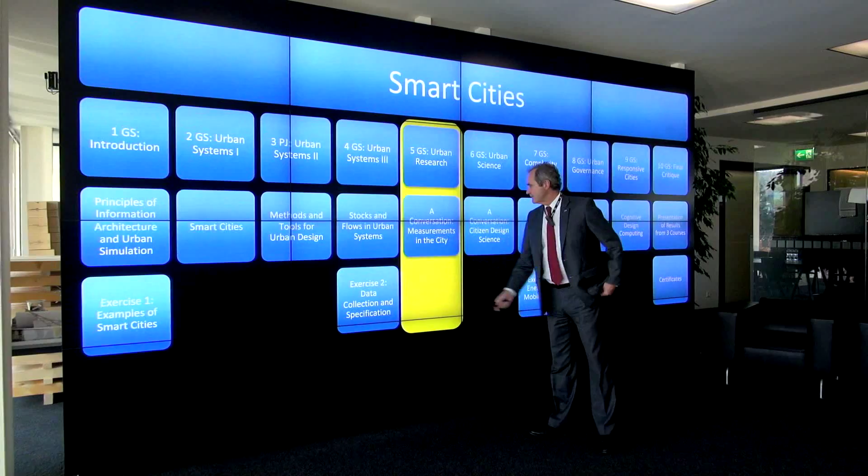We are here now on our fifth lecture. It's a conversation on measurements in the city. And this is, of course, in context with the next lecture, which will be on urban science. So urban research and urban science are closely related.

The story so far: last time, two weeks ago, we had this big topic of stocks and flows, and why they are important. From this rock falling down, you could visually see how a stock, a mountain stock, is turning into a flow. So this is just one link. But we could see that stocks and flows are fundamental concepts for understanding the working of a city and also of a smart city.

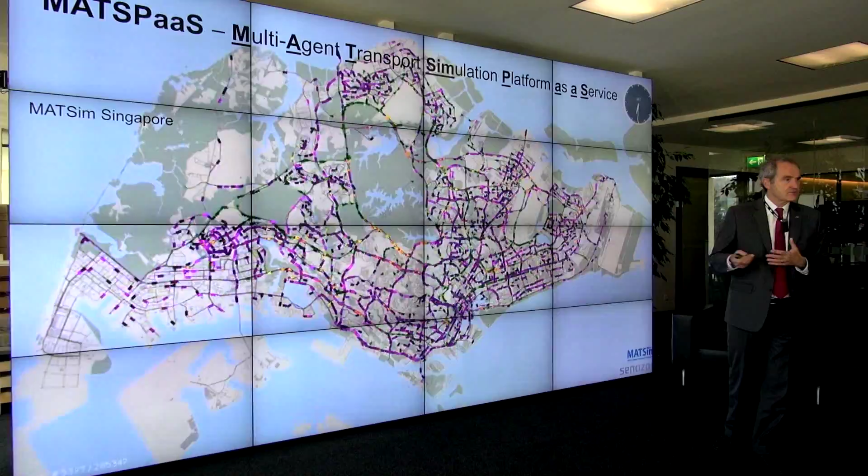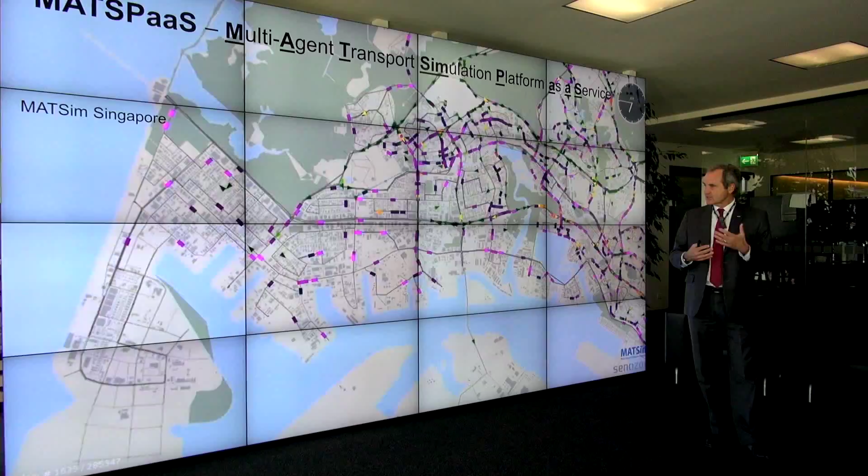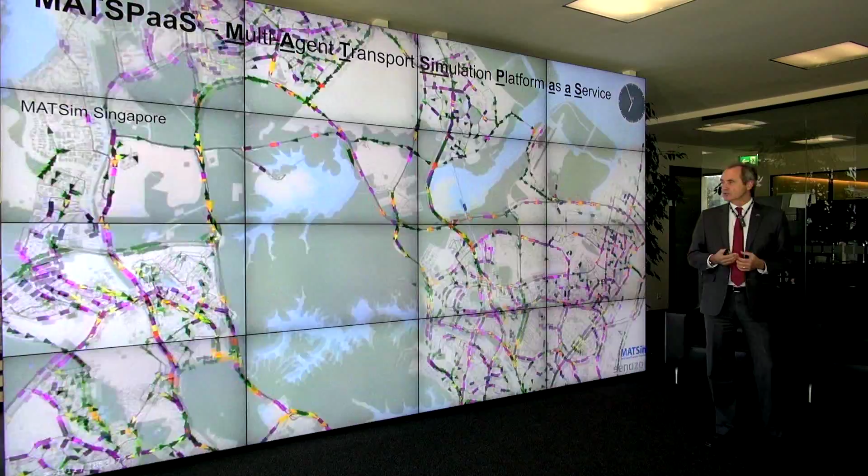If you remember this image here, this obviously is a result of urban research. That is the traffic simulation. And if you remember what simulation is, simulation needs an underlying model. It needs to have connections between the parts of the model, and then you can project something into the future that you want to have as close as possible to the real thing. In this case, the real thing would be the movement of cars and other vehicles in a city. So this is the result of urban research.

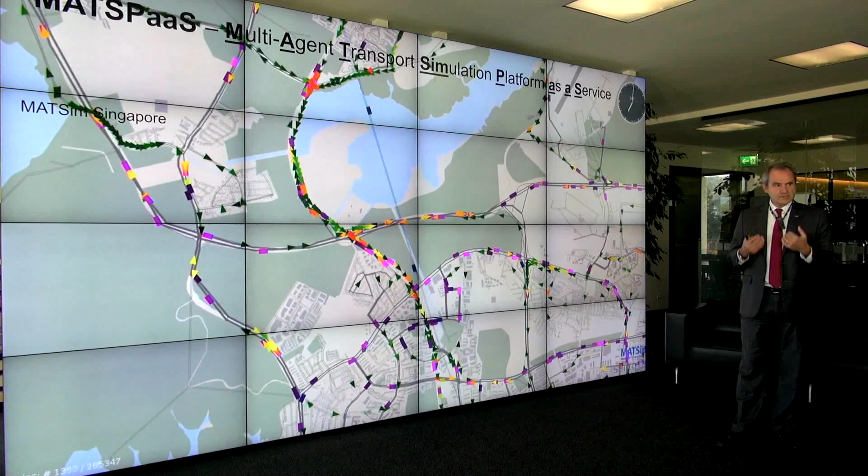But today we want to go a bit deeper and look at how we actually do that. And for that, we have to try to understand cities. The understanding of cities is a big topic that will probably never end, but I want to give you one route of understanding cities that is quite known to maybe some of you, but it's at an early stage of urban research.

We had a person, a mathematician actually, whose name was Christopher Alexander. Does anyone of you know Christopher Alexander? Ever heard of him? Yes? What did you hear of him so far? The Notes on the Synthesis of Form. The Notes on the Synthesis of Form, exactly.

And he also wrote A Pattern Language. And he also wrote another one which is quite famous, another book in the 60s, in the mid-60s already. That's called A City is Not a Tree. And The City is Not a Tree, this is an excerpt from this book.

And I think it's quite helpful to understand how different people view cities and try to understand cities. So he writes: 'The tree of my title is not a green tree with leaves. It is the name of an abstract structure. I shall contrast it with another, more complex abstract structure called a semi-lattice. In order to relate these abstract structures to the nature of the city, I must first make a simple distinction.'

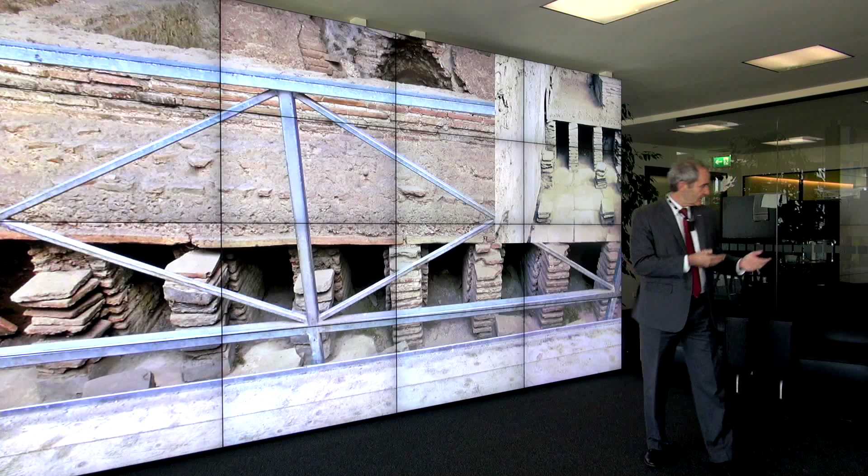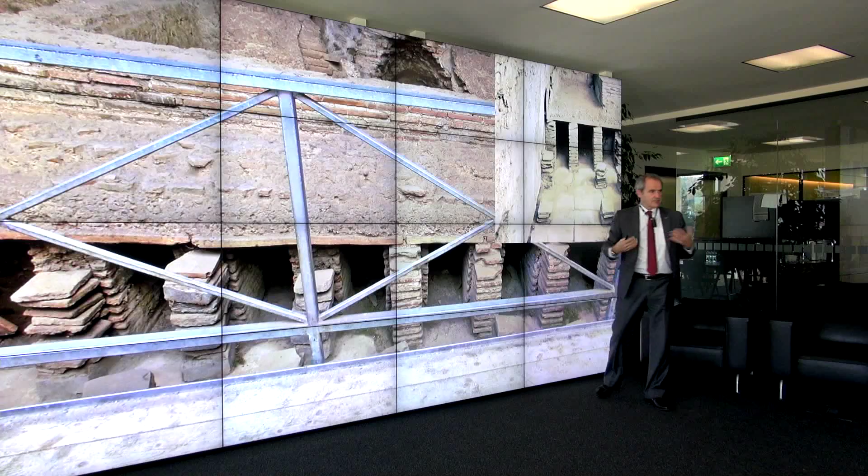So how could it happen that they didn't check it? What happened? They didn't have a model of what this meant. Although after the first rumblings of the mountain, their water supply, which was also sophisticated, coming in leaden pipes almost 2,000 years ago, stopped running. And they didn't have a model, they didn't know what to do, they didn't do the measuring. They did some visual checking, because they saw the mountain erupt. But even after they were covered with ashes after the first evening, they didn't take the right decision.

They didn't understand it. They didn't take this warning sign. They didn't take action. They just remained there. They waited. They thought it's over, like a thunderstorm.

And then, of course, what happened? The next day, the whole plume collapsed, and then you had this terrible hot air and hot ashes and hot lava coming down and wiping out everything and everybody. So the point is this: in a smart system of a city, it is very important to have all these things working. Today, hopefully, that would never happen again, because in many places in the world where volcanoes are active, all these chains of actions have to be taken, and mostly are taken.

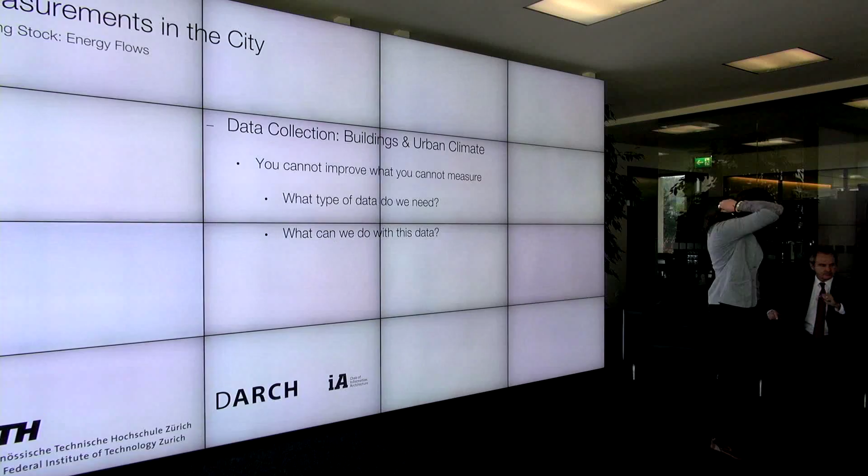And I'll also take this.

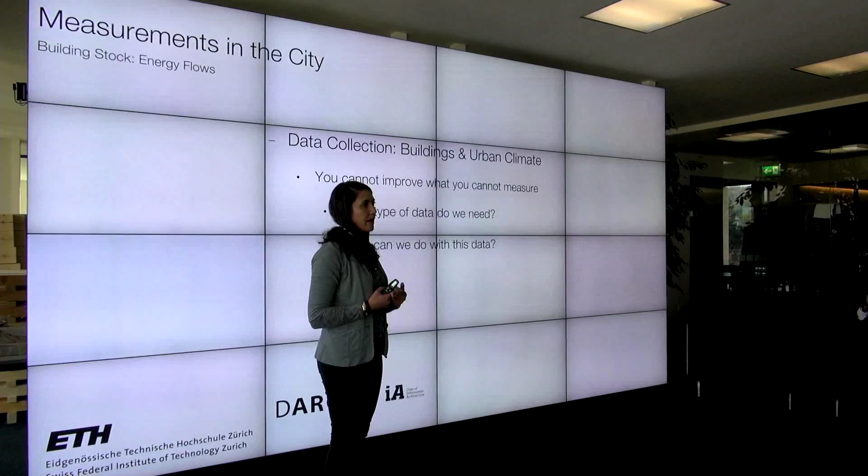So today I'll speak a little bit about measurements in the city, or more about measurements in buildings, and then Estefania will talk about an urban environment. So sort of outdoor measurements, I'll speak more about indoor measurements.

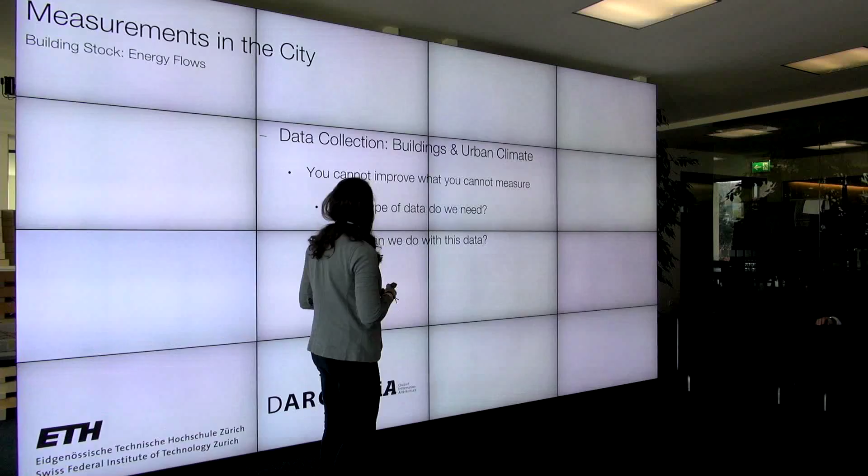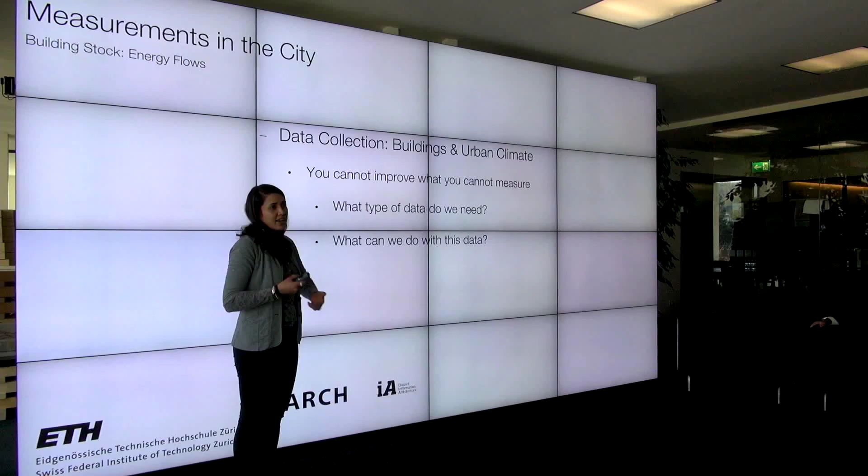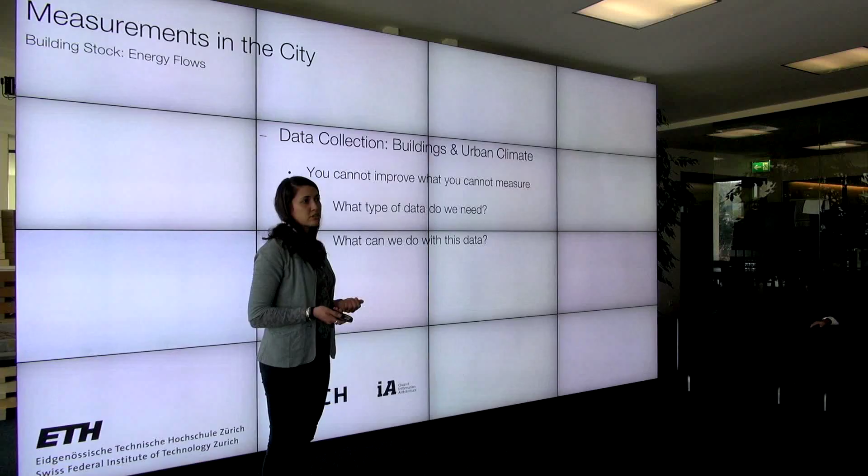The first thing I want to highlight, as we discussed in our slides, is that you can't improve what you can't measure. That was the philosophy which I had for the majority of my academic and professional career. So what type of data do you need? And then what can you do with that data? I'm going to present a few case studies which I have worked on.

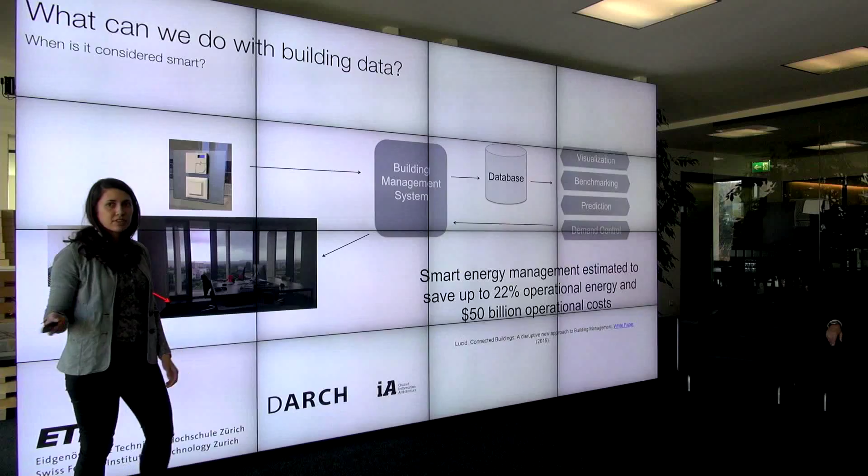Let's see, I'll just put it all together because the animation didn't work out as I wanted. But I'll start here with typical measurement devices in a building. We're all relatively familiar with thermostats, light switches, and this is a control device which senses if the window is open or closed. These are relatively common elements, sensors in a building.

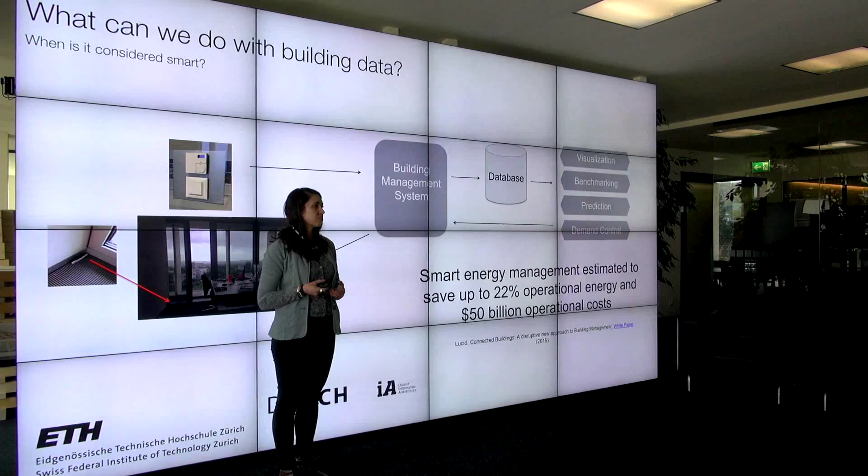You could also have energy meters. They're kind of ubiquitous in a building. Typically it's isolated in this system right here. So you send this information to the building management system. It regulates if you turn on or off your heating system or your cooling system for that particular space. So it provides the standard indoor thermal comfort for your space. It sort of typically exists in this environment.

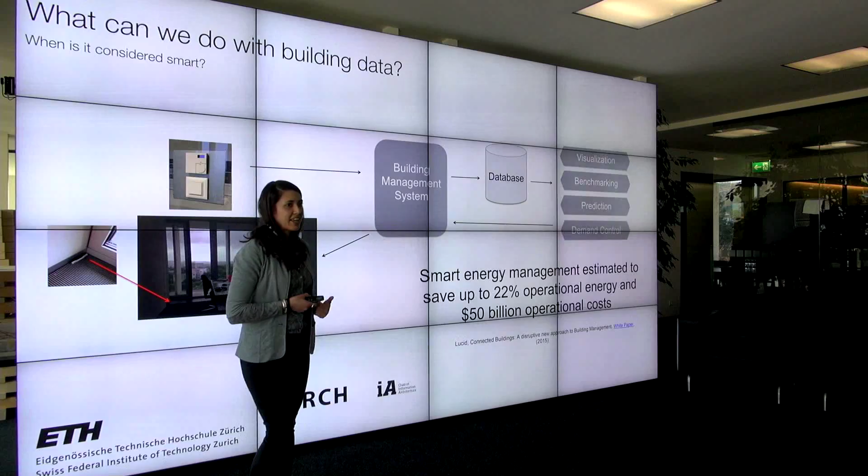But most people might consider that a smart building, because you have some method of controlling indoor temperature and requirements. I don't believe that actually this is smart, because you can't actually do anything with this data. You can't look at your data afterwards. As Professor Schmitt mentioned, you want to be able to look at this data to make better predictions in the future.

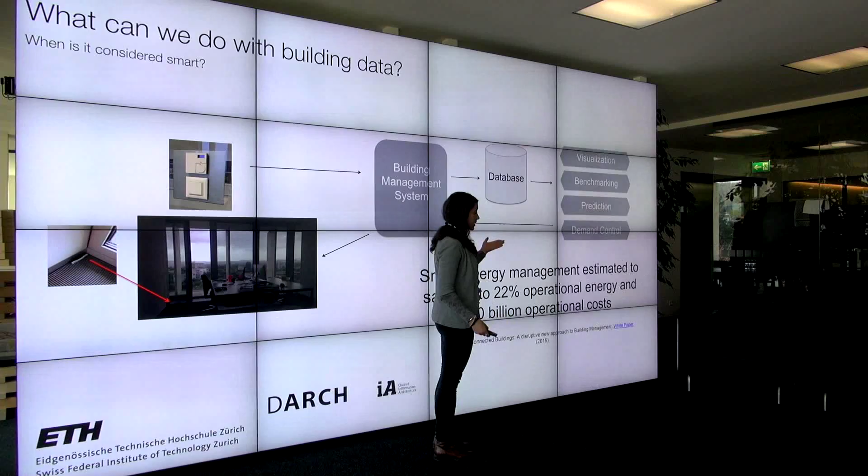So the next step typically is to provide some sort of database, okay, we can store that data. But that's often what happens in buildings - it just sits there. So the next step to make a building more intelligent is to have some method of visualization, benchmarking, prediction, and then what I think is an intelligent building or a smart building is when you have a control method that takes this data in real time, which is typically a demand control system. It makes modification to the building management system, and then it updates the thermal comfort quality in the space.

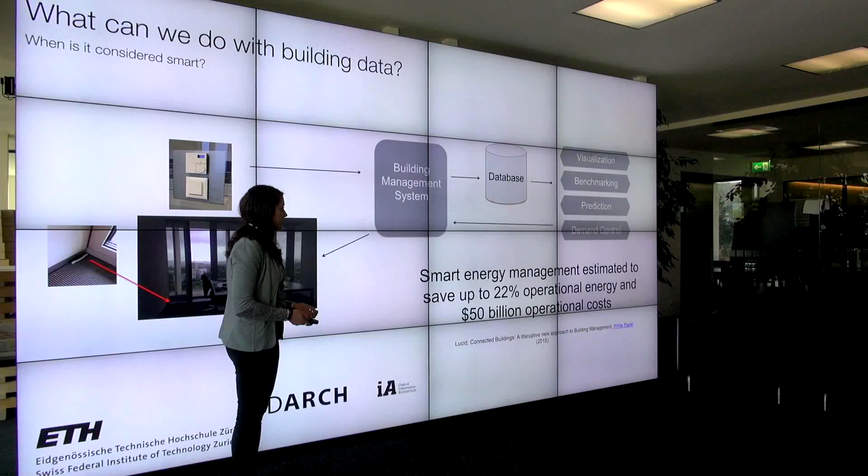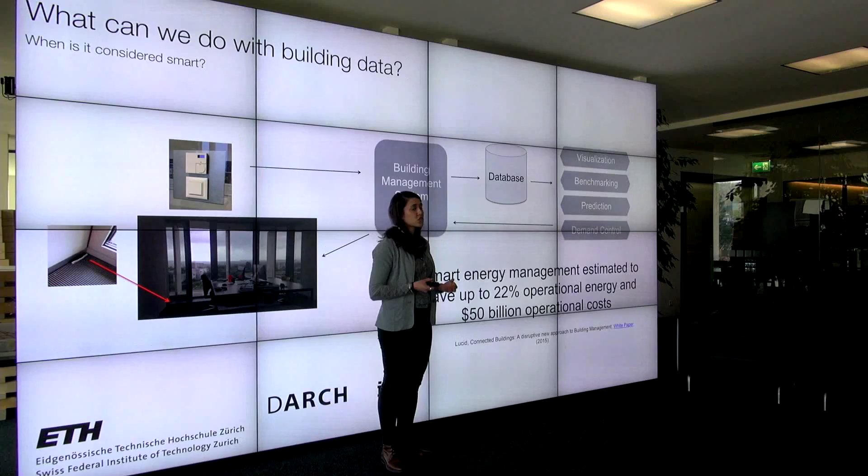So for these types of smart systems, the operational energy consumption in the US is anticipated to save about 22% energy for all building stocks if implemented correctly, which is very possible. And close to $50 billion of operational costs are also saved.

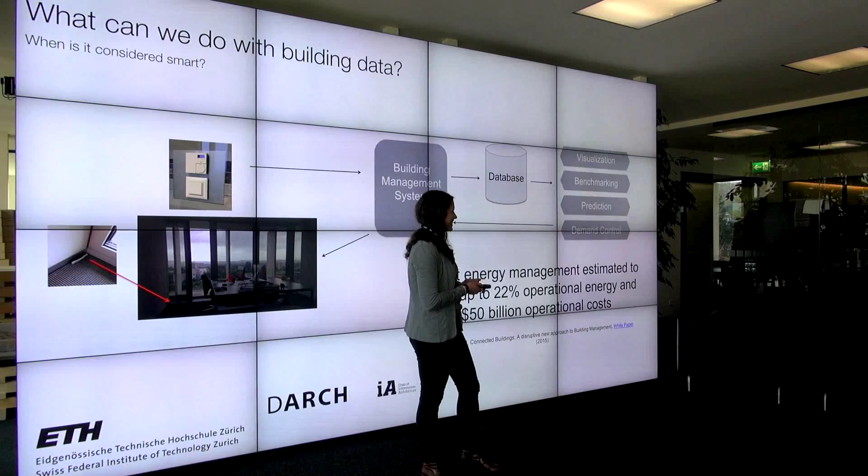So this is something which... you have a question? As it's a conversation, sure, maybe you can just recall what you saw before. And also, you should say, these things, they're actually here in this building, right? Yes, yeah, yes, you can actually look at them.

That's why I chose this example. You can actually look at them. You find those sensors all over the place. And if you relate it to what you saw before, either in Pompeii or also this rock coming - if you just have this, it's not so smart. But if you have the visualization and, most important, the prediction, then that way they could predict the rock is going to come. And it was a smart setup in this case.

So from a smart building to a smart city is a relatively small step. Go ahead.

My animations didn't happen to work out as I wanted, but I could just walk through them sequentially here. So this is a project that I worked on while I was at the Energy Research Institute at NTU in Singapore for 2.5 years.

One of the first tasks I was given was to benchmark the campus buildings at NTU. Benchmarking means classifying your buildings. I was working with mostly laboratory facilities, which have a wide variety of energy demand qualities — could be a chemistry facility, a physics laboratory, a math laboratory. So you have different demands for different building types.

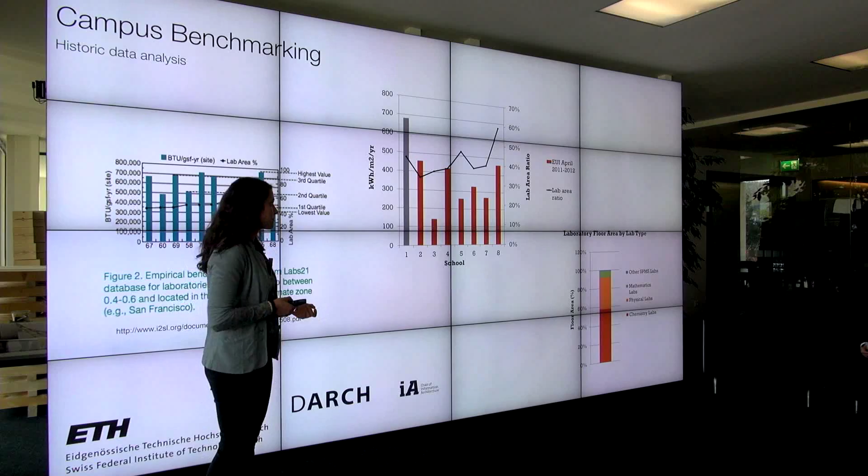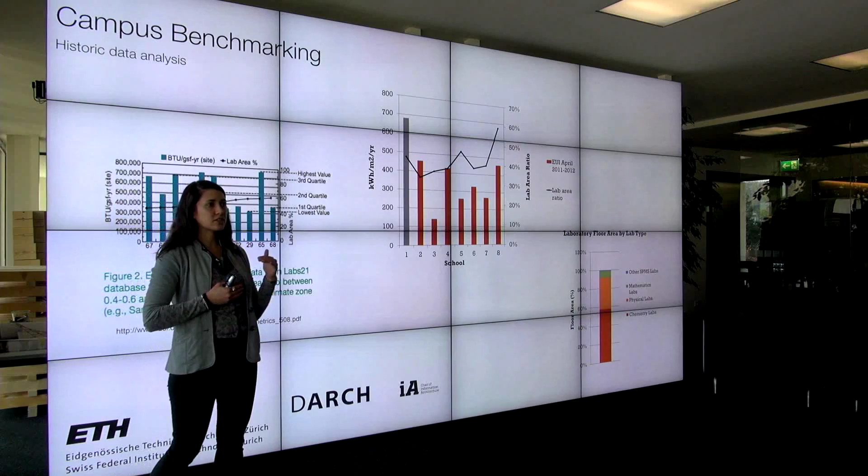There was big research that went into developing laboratories for the 21st century. They consolidated large databases comparing thousands of laboratory facilities around the world so they could come up with benchmarking metrics, because you're going to have very different energy demands for different laboratory facilities. That changes per climate, per use type, and so forth. So they've created a really robust database so you can start to compare yourself to your peer groups. This is where this came from.

I did that for the laboratory facilities at the NTU campus. This was really insightful for us because it had never been done before. They had 8 major laboratory facilities on campus, and one in particular was their highest energy consuming facility.

This is kWh per meter squared per year. It also had roughly the same lab area ratio, around 40%, which was pretty standard. So even with this one having close to 60% lab area ratio, it was not necessarily the highest consuming laboratory facility on the campus. So this is information that gave us insight.

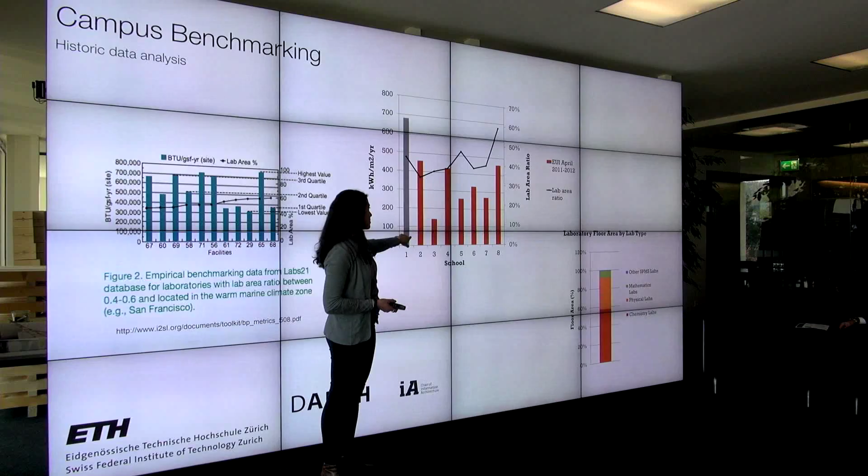We worked on energy efficiency for the campus. We looked at this and said, okay, we really need to address energy issues and energy conservation for this particular building. They hadn't done this so rigorously before.

Taking that a step further, we looked at the floor area ratio for this particular building. The majority of it was chemistry laboratories, then there's also physics, maths, and other types of fractional lab space.

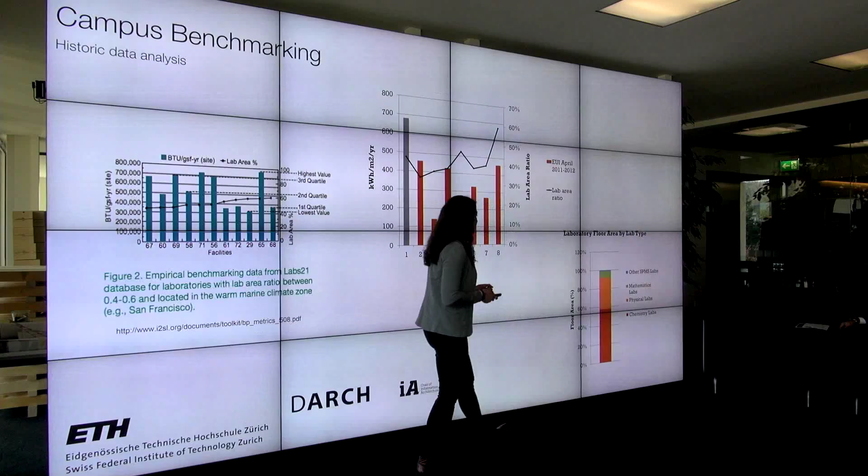So you say this was an insight for you, and that also means that if you had not measured this, you wouldn't have seen it, right? Precisely. Nobody would have known. Yeah, okay, so that was a new finding from this study.

Yes, and as I said, this data had been sitting in that database for years. They had collected this data, but never actually did anything with it. This was something where you can't really gain any insights if you don't run any very simple analysis, but you can start to reveal interesting things from that.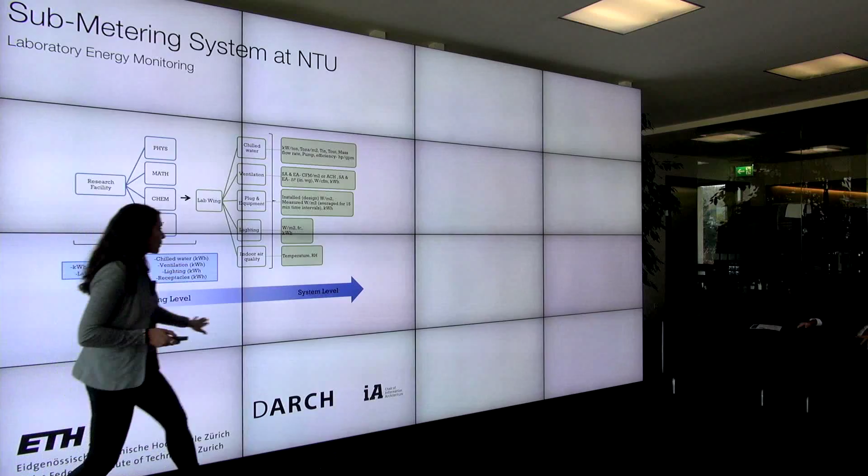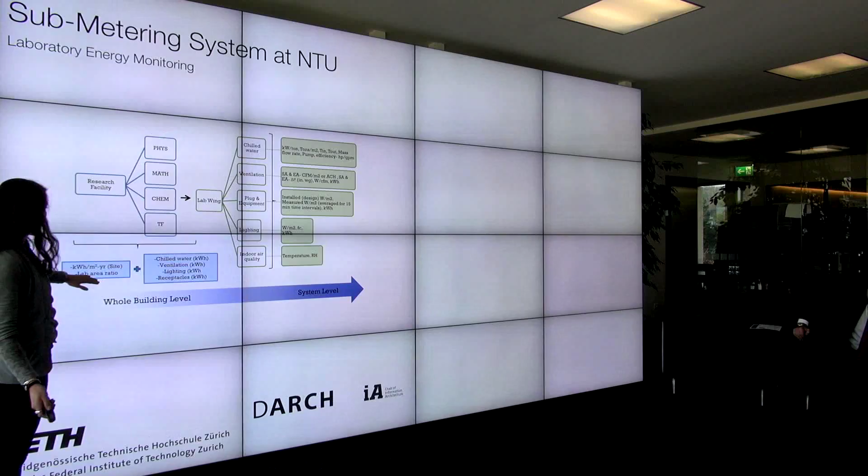So yes, my animation actually worked. This was where we looked at the whole research facility, and then you can go into more system level analysis. First, looking at this research facility, you can do very high level metering and get information — the energy consumption per square meter per year, and the lab area ratio. These are very high level analyses that you can do.

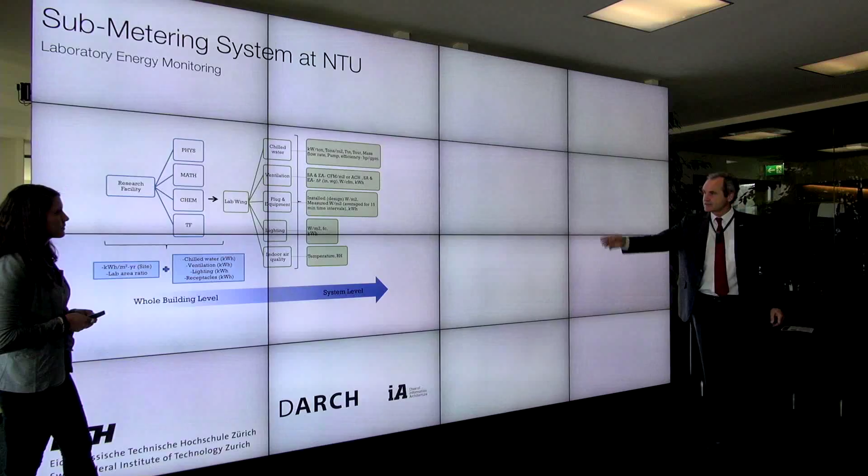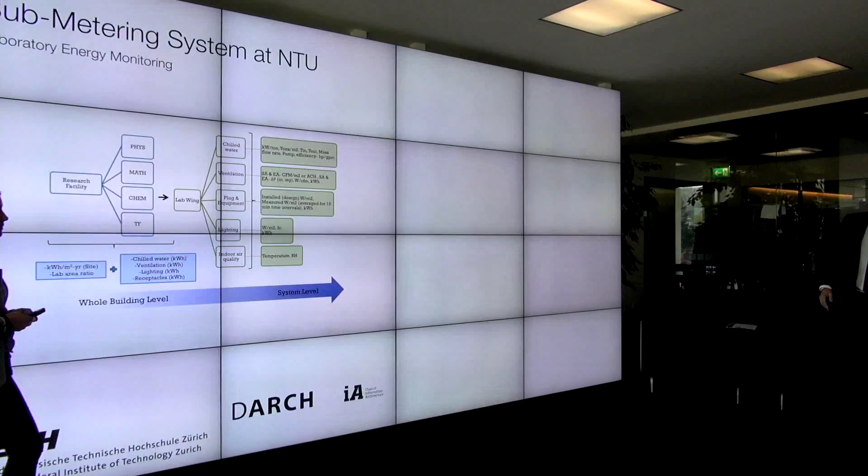But it's just trees — and what we showed before, a city is not a tree. This is just expressed as a tree, a representation of a tree-like structure. So you break down the building into pieces, but you don't have any interaction between the pieces yet in this representation. Not yet.

Exactly. And so the next level — these measurements go from whole building to system level. The next step is to get more disaggregated energy consumption measurements: what you're consuming for chilled water, ventilation, lighting, and your receptacles — anything that's your plug loads. These are also broken down for the different lab types.

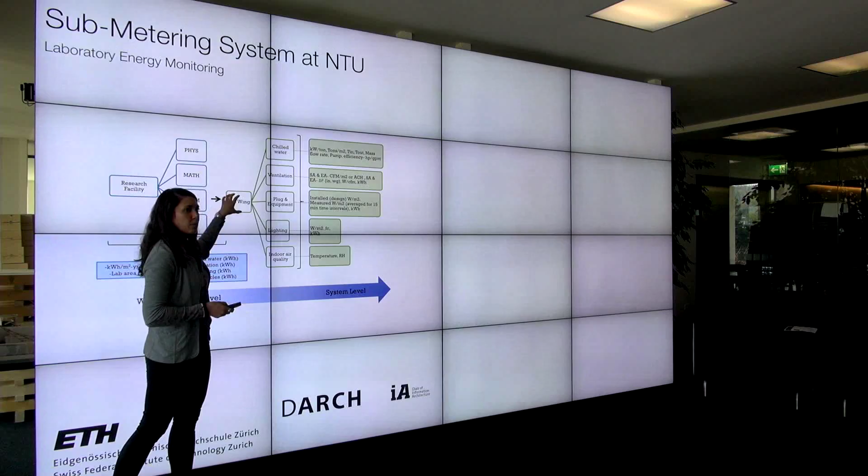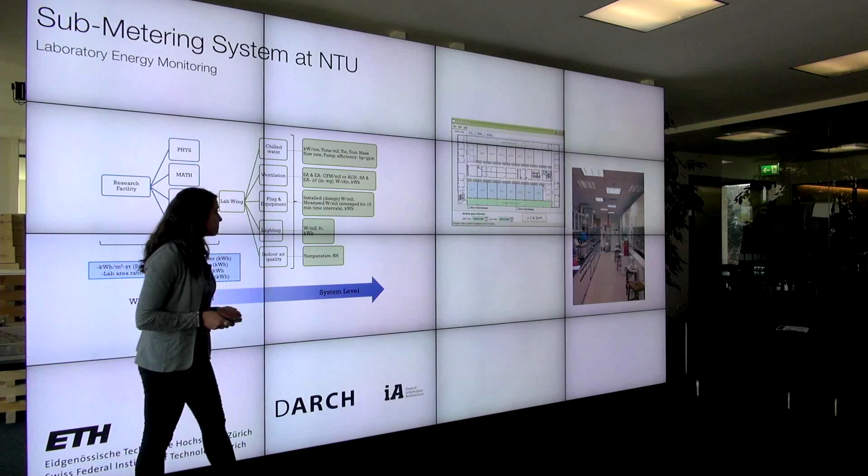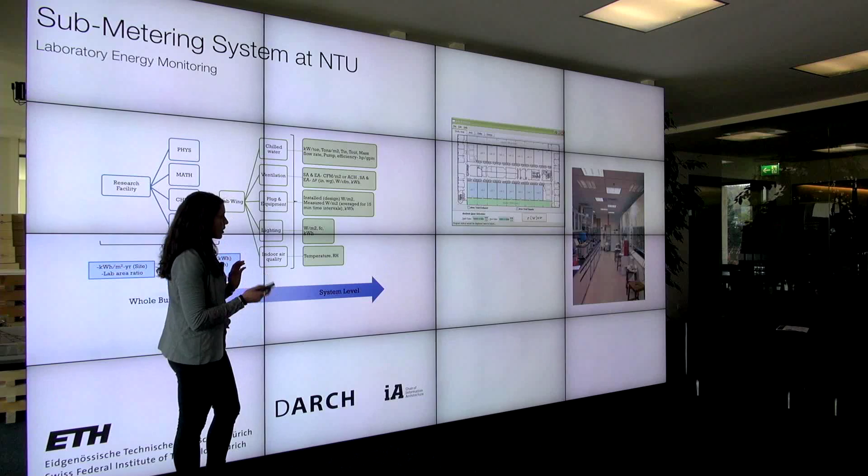So then, as I said, we focused on chemistry — one particular lab wing which was representative of 3 different stories, making up the majority of the building floor area in that chem lab wing. From the lab wing, we went down further and had more detailed measurements, which I'll show in the next diagram on the next page.

We had some measurements that were already existing in the building management system, some which weren't, and where we needed to add more sensors and meters to collect that additional data to have a more holistic set of information. So this system, some of it was already measured, some of it wasn't, but all of it was just sitting in a database, and it was used to control the system.

So it was doing its job, meeting its very basic requirements for supplying the right air quality and temperature for those laboratory facilities. So it was doing its basic job. But we thought, okay, we have this issue of a really high energy consuming facility. We need to reduce it.

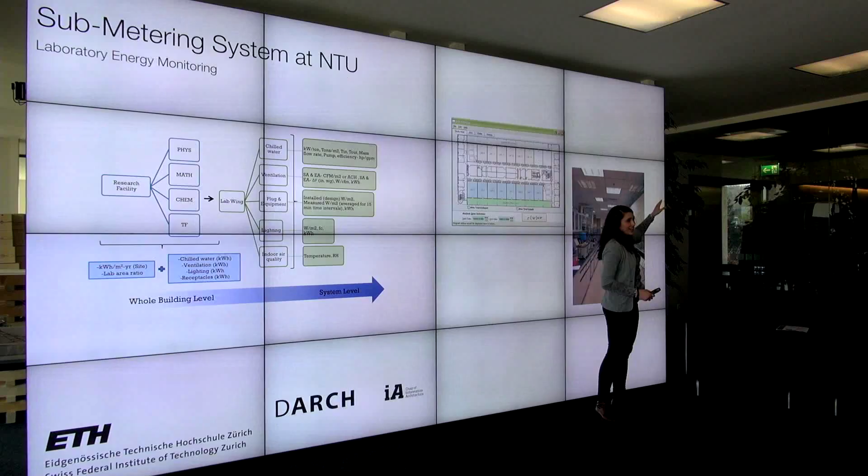So one particular issue for these lab spaces are the dense fume hoods that they have. If you've ever been to a laboratory facility, these fume hoods consume a lot of energy because they're conditioning this high volume of air in Singapore. This is the highest quality of air that you can supply to a space. It goes in and it goes right back out, supplied to the space and immediately sucked out and sent outside to these exhaust plumes. So you're conditioning these huge volumes of air that is then just exhausted right out. That is an issue when you're looking at energy consumption.

So this is when we decided we're going to make an energy dashboard for the people in this space. All of these researchers that are in there, they can see the impact it makes when they leave their fume hood sash open. This was used as an initial test case for them to see that yes, your energy consumption is actually going to be increased substantially in your space, and you are contributing to this negative energy consumption in your space.

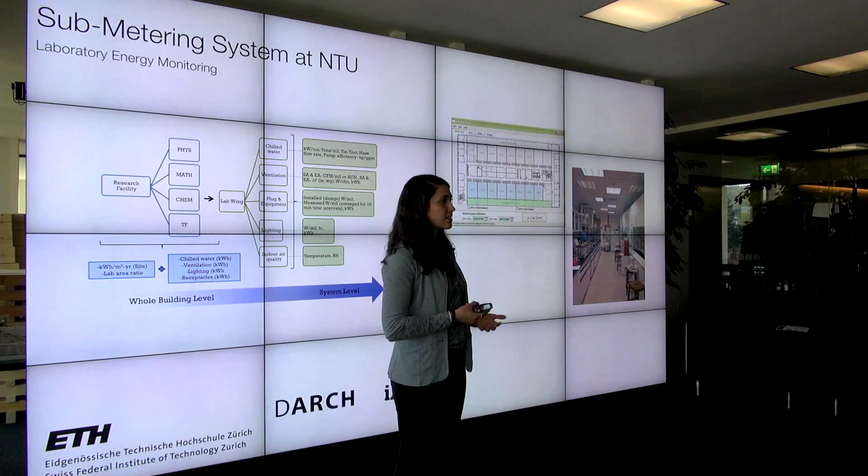But they could actually start to see it, and we were working with the professor for this lab, and he was thrilled that he can finally measure this, because he was always going around saying, hey, close your fume hoods, but nobody had this real incentive to actually do it. So now he had a visual method to say, hey, you left your fume hood open last night, and he could use this in real time, which was a great outcome.

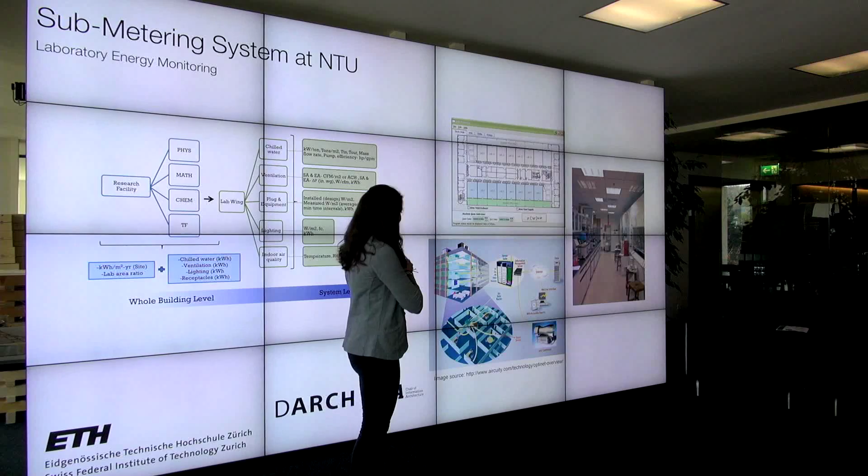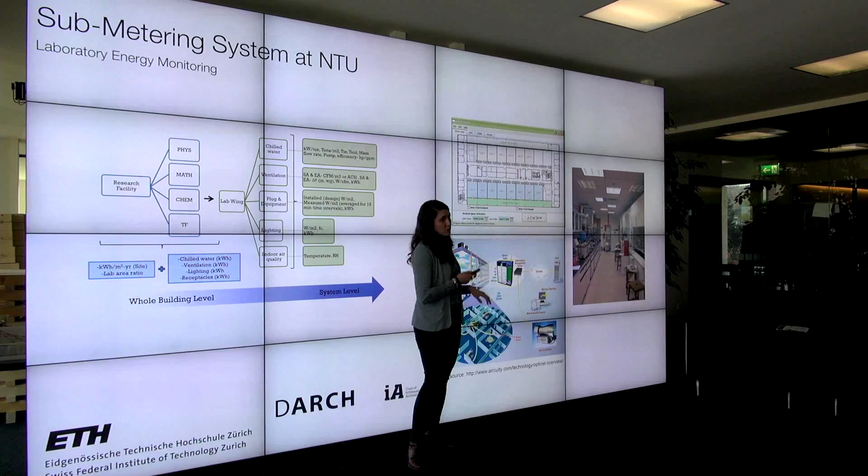So for the rest of the spaces that weren't fume hood driven, we actually were working with a company to install this sensor suite, which they were looking at other metrics, but you want to use this type of sensor suite to control spaces that were not actually human operated, so not fume hood driven.

So this was the communication network that we set up for it, which was really cool because we did it for one building space, and then the campus was interested to expand it throughout the campus.

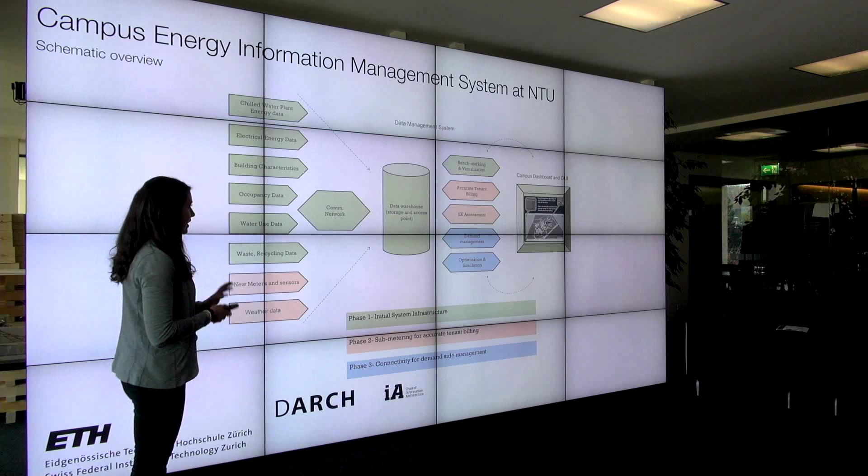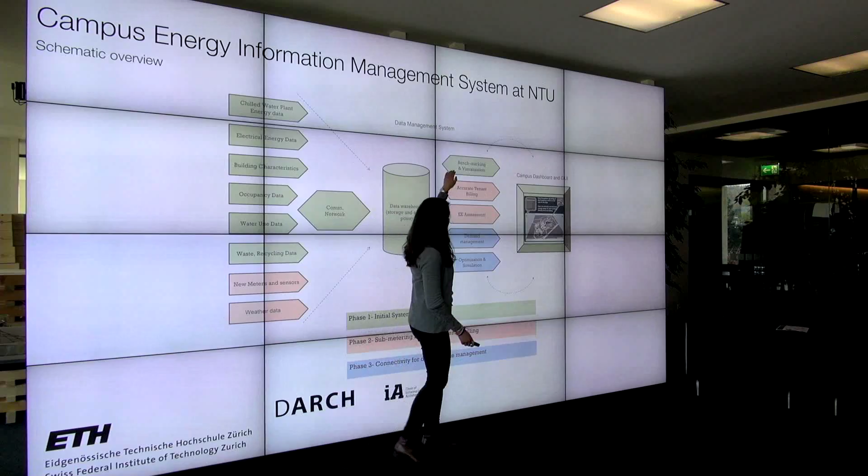And then on top of that, we had a set of analytics that we wanted to run. This communication network is kind of representative of what I showed in the previous slide. And then these are all of the data that you would need to go into this system, collect it. You have a data warehouse, and then you have different types of analysis, and then you always have to have a visualization platform for different types of use.

So you can have a use for the public, you could have the use for the facilities management, you could have use for the occupants. So you just tailor it to your audience.

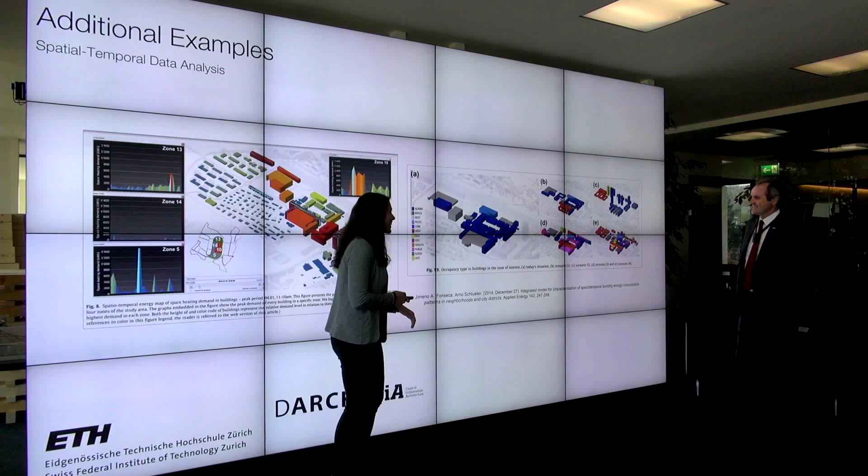Shall I just skip through this? Yes, okay. And then this is the only thing I want to say about this.

It's spatial temporal data, so that's another way you can display large data sets. My final conclusion, I think we've said it several times, but pretty much all buildings and campuses have meters and sensors for building purposes and building systems control, but it's not necessarily smart, unless you run analysis and specific control systems on it.

Thank you. And now, keep in mind those different ways of looking at historic data. This is for learning from the past. And then she went to real-time data, learning from now for the immediate future. That's where we start with Estefania.

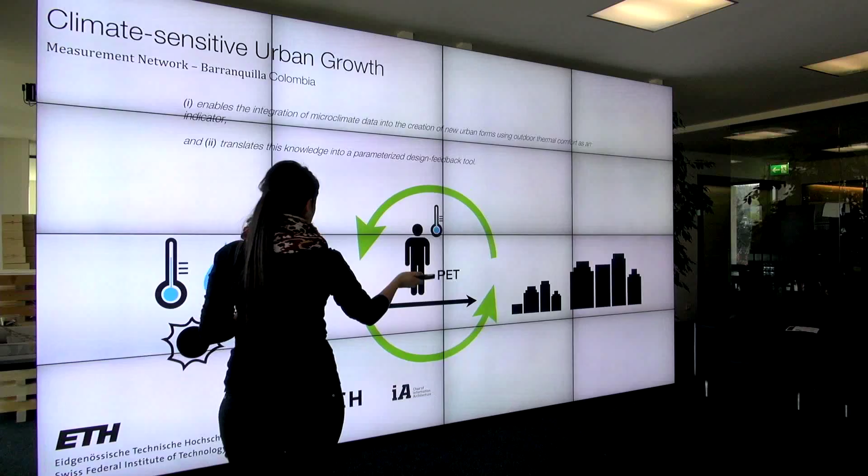So now going from Singapore all over to another part of the world, which is still the tropics, we are doing research in the Caribbean, in Barranquilla, Colombia. In this research, we also have the same idea that we want to collect data. In this case, it's outdoor, a difference from the other example. So we collect outdoor weather data, and then with that we want to do a series of analyses based on outdoor thermal comfort, and at the end try to get some findings of the relationships between the urban geometry and the collected weather data.

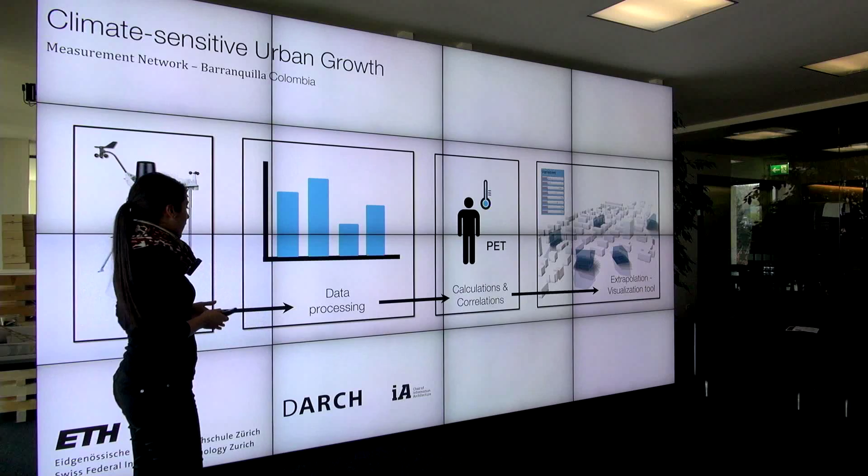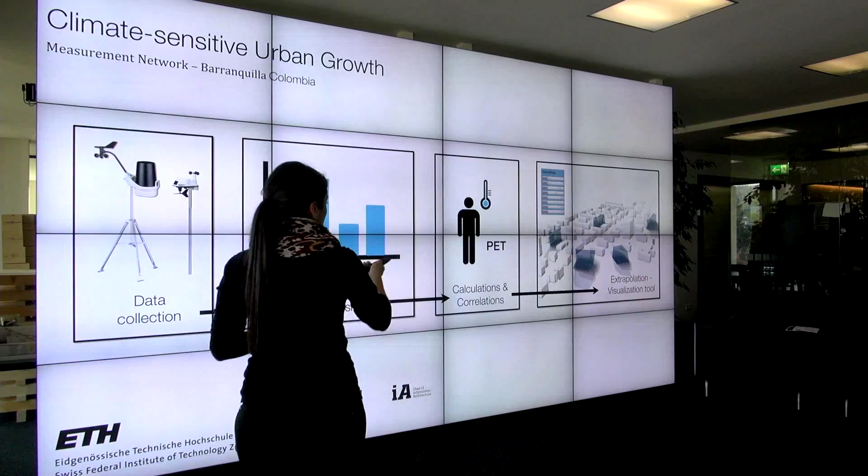For this, what we did is develop a method where we first had the data collection, so we designed a measurement system outside a campus of the university. Then we started collecting the data since last October, so it will be already 1 year. At the same time, we had software processing the data meanwhile. After that, we wanted to do some thermal comfort calculations with the data we got, and afterwards create a simulation of the city according to the data collected before.

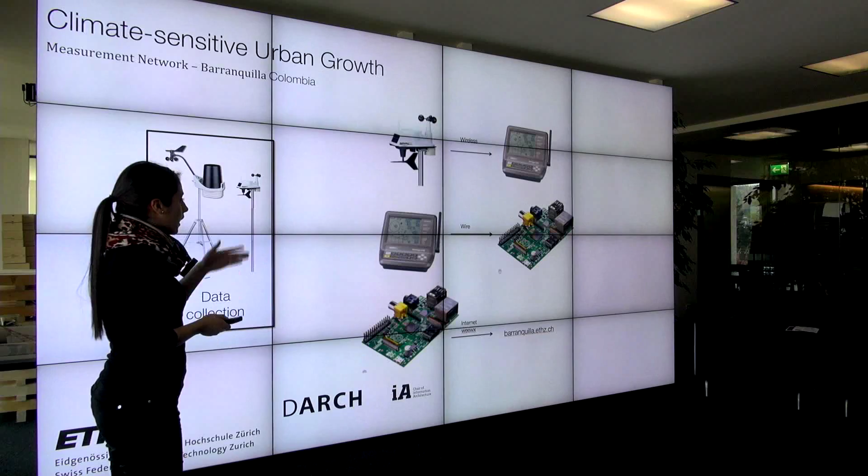Right now I'm just going to show you the first part, the collection of the data and the measurement campaign we did, the measurement network we designed. So what we did is put several weather stations around the campus of the university with different orientations and different types of weather collections. We connected it to a computer, a Raspberry Pi computer, shown on this side.

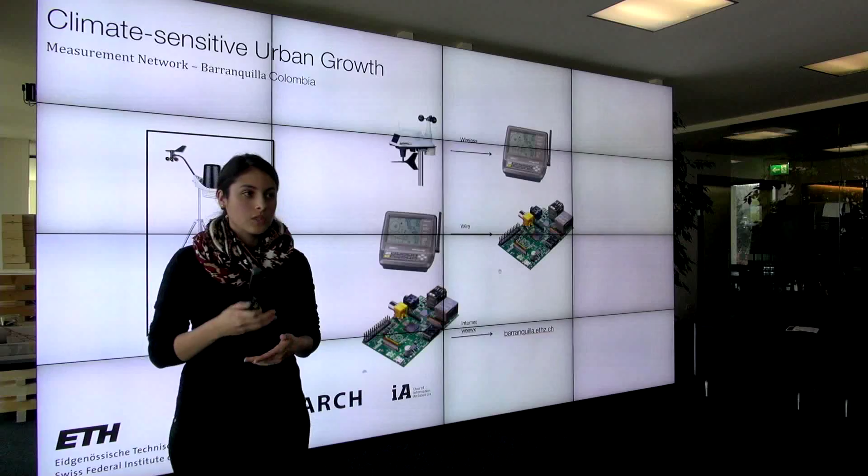We connected it to the weather station, and at the same time the computer was connected to a web server. During the meantime, during all this year, we could monitor all the data collected by the weather stations. So that was the system we designed, so we could monitor the data collection from the weather stations, and at the same time...

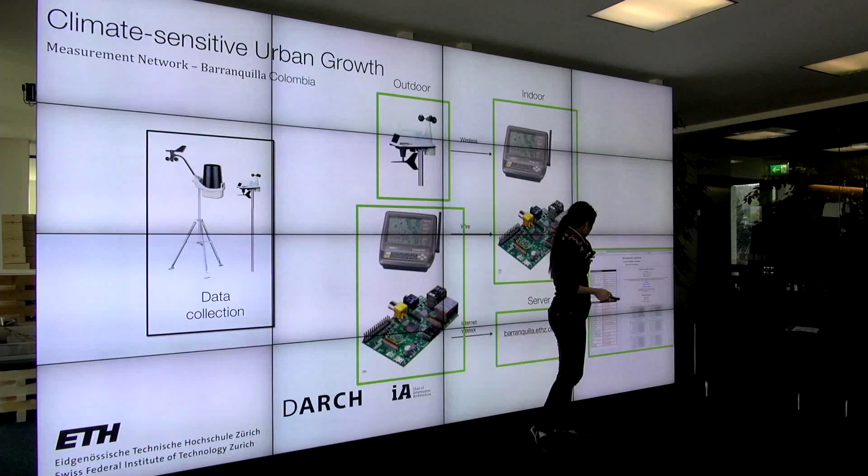The software from the weather station also gave different analyses. So it started doing data processing meanwhile, so we could have the mean values for the day, for a month, and even for 6 months.

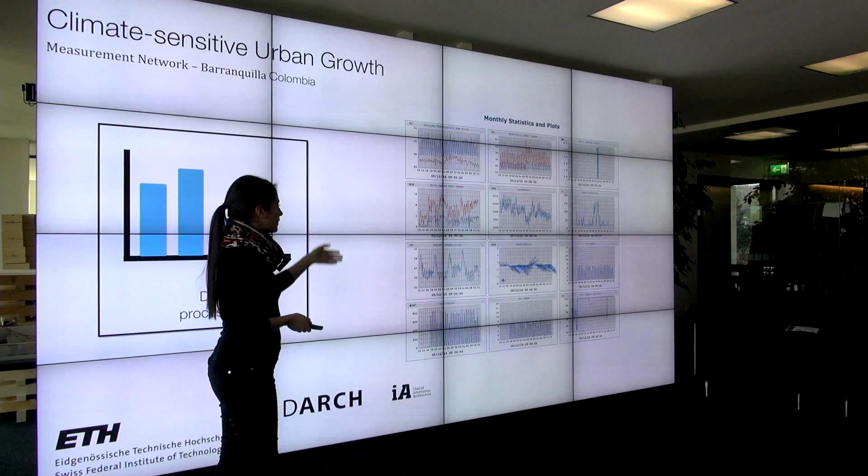This is the setup of the measurement network that we did. This is one of the weather stations. And this is how we monitor and see the monthly statistics of different weather parameters like temperature, rainfall, solar radiation, etc., and also the mean values, as I mentioned before.

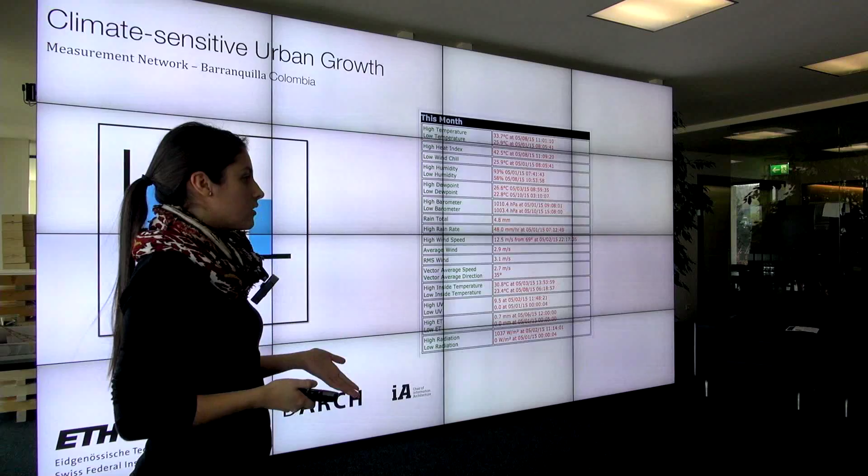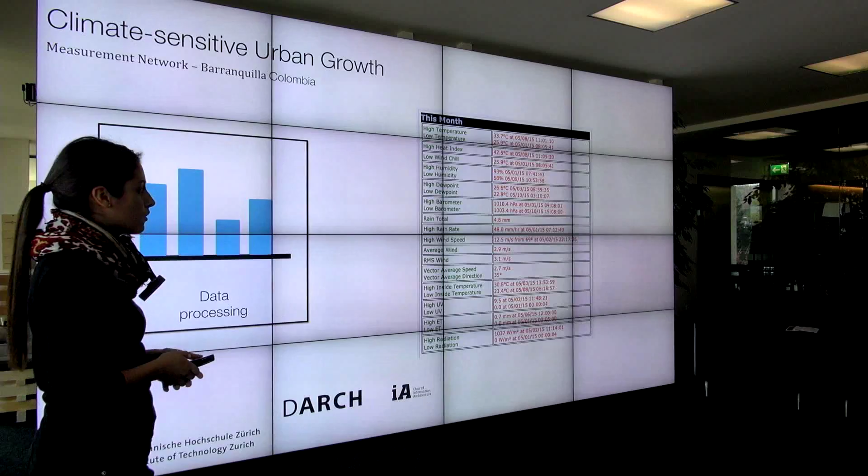But of course, it's not only about collecting the data—as we already mentioned, the idea of collecting this data is that we can analyze it. So it doesn't just get stored, as Danielle showed before, for a long time, but that we can grab the data and analyze it. For this, we want to do some analysis of the outdoor thermal comfort, and we already got some insights, some results of the weather comfort.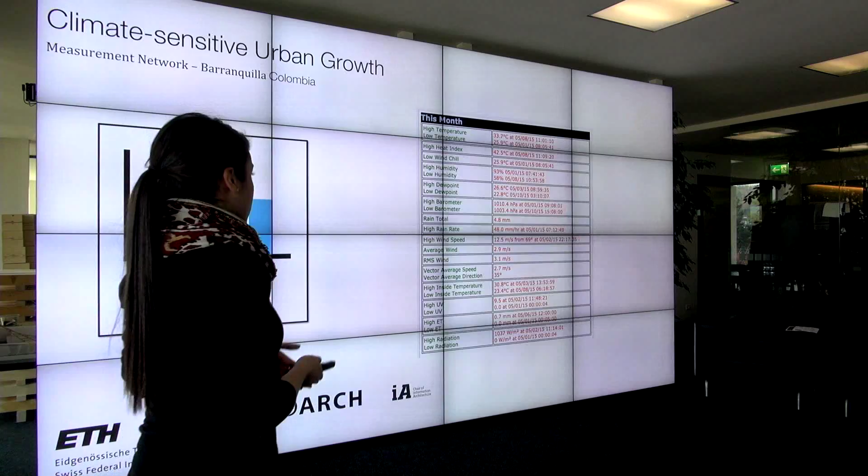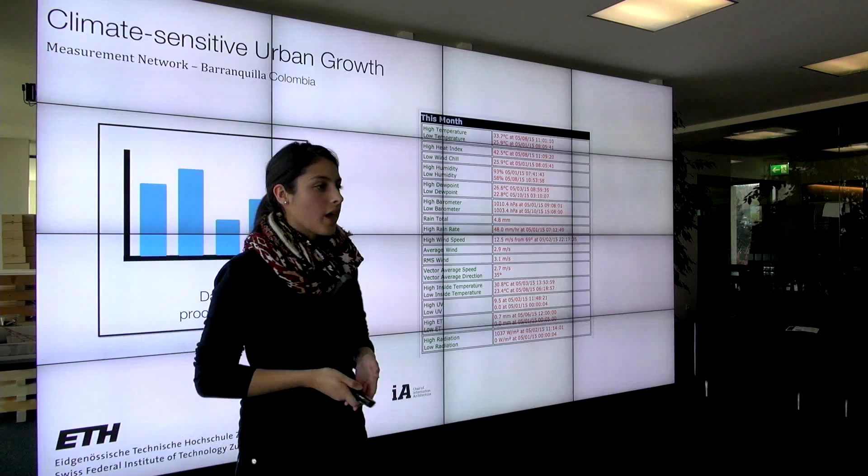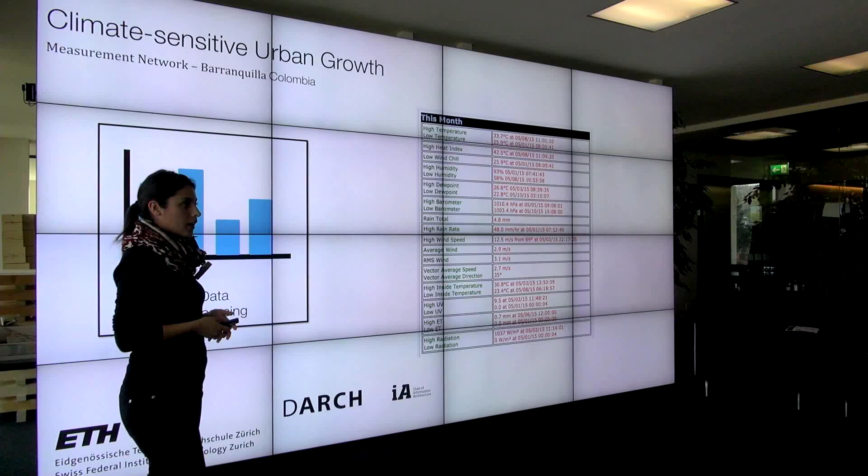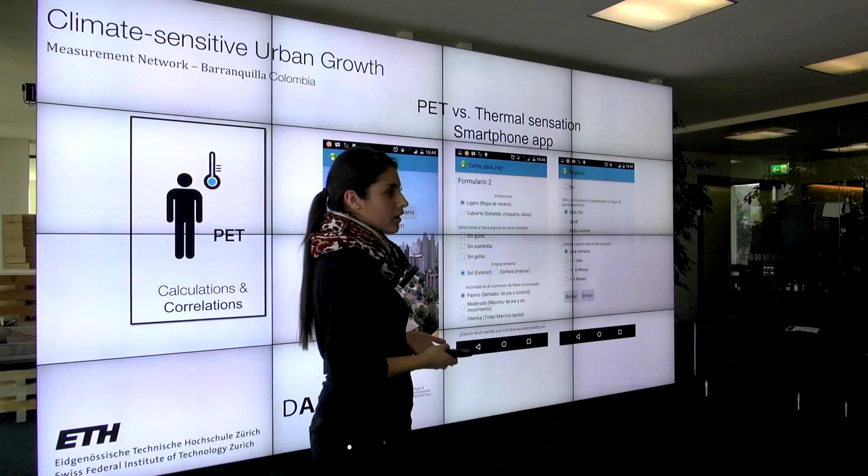But what I wanted to highlight today in this course is that for a smart city or smart system, it's not only about the data we collect according to sensors or different technology we have, but we also have to get the data from the people. So my opinion is that a smart system is not only about technology and sensors, but also what we get from the people. For this, we also developed an Android application where we get insights from the people. So we analyze the thermal comfort with our computational models, but we also wanted to ask the people how they were feeling. So we not only get data from our sensors and technology, but we also get the insights from the people.

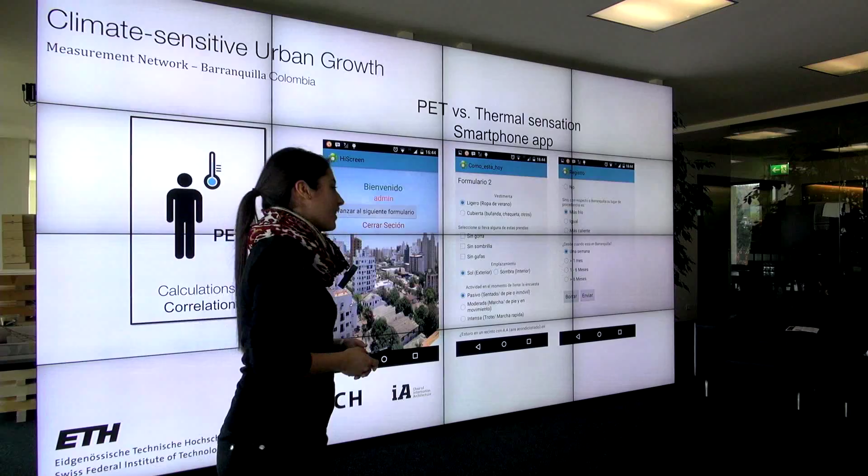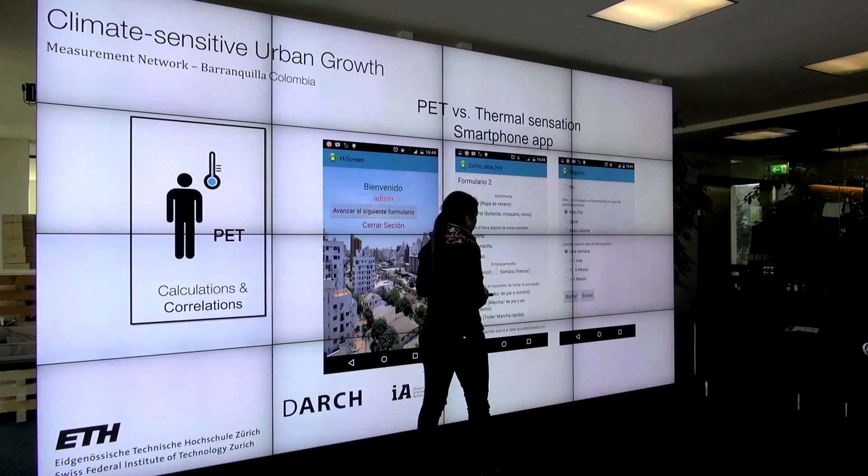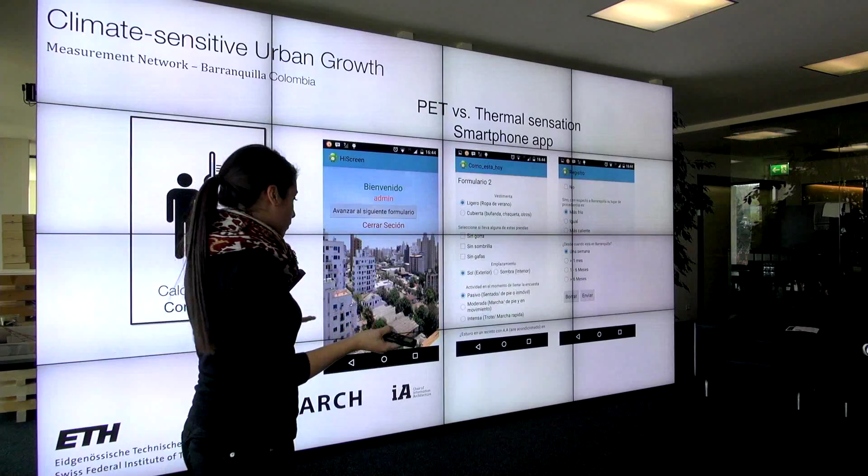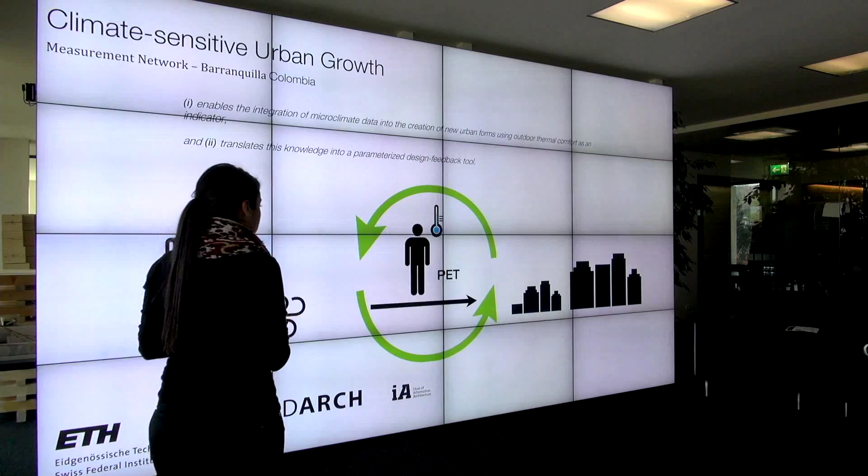What we mainly ask here is how they feel, if they feel cold, if they're comfortable, if they feel warm, where were they before, if they were indoor, or if they stayed a long time in the outdoor space. The idea is to gather both databases, the data we get from the people and the data we get from the weather stations, and start doing some analysis and correlations. The final goal will be to learn from the thermal comfort of people in the city and have insights of how the city should develop in the future, or how we should develop open spaces for pedestrians to feel more comfortable with the weather. So this was my input.

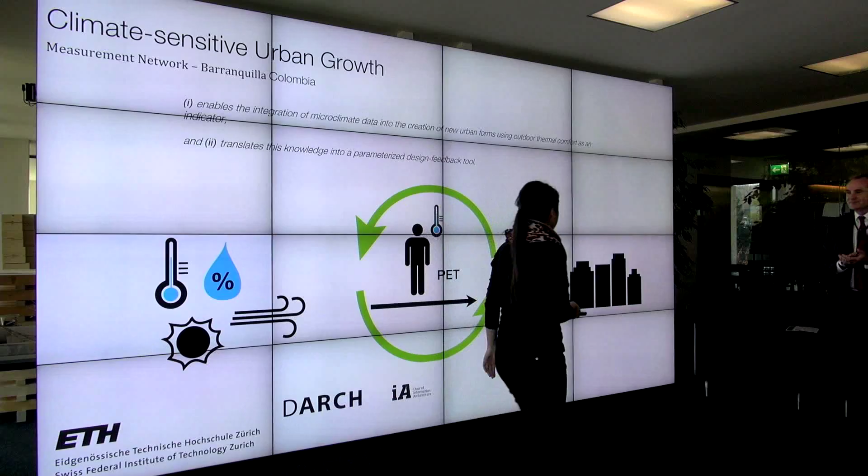So you can see these two women, they're actually not just talking about smart cities, they're really doing it. These different aspects, the long-term historical data coming to the real-time data, these measurements, which are really readable as we are speaking. She can open up those tables and look exactly at what is happening right now, which is very important. One thing you have, you said the data is not stored very long, but we want to analyze it. Of course, by analyzing data, you don't destroy it.

They're still stored, but they are being made more useful in this case. Okay, so that leads us to the exercise, the exercise that you're doing now. Just for the exercise that you're doing right now, I hope you all downloaded this one, and you got it from Danielle directly, and you're working on it now. I think it's important that you come to the base or the essential parts of this exercise.

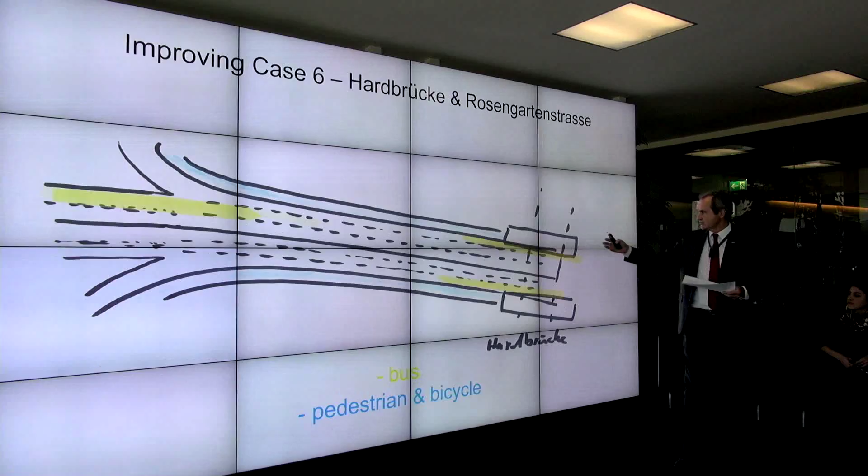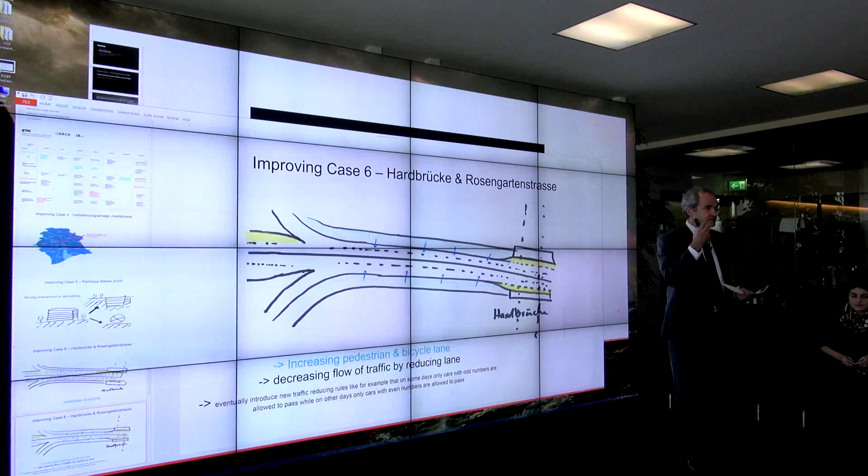Okay, so don't worry about this. Here you can clearly see it's a street. You want to show what the buses are doing, what the pedestrians are doing or not doing, what they should do. So it's important that you come to this level of explanation of what you mean. This is what we want to get out, what you mean, not totally perfect.

Maybe we can come to the conclusions now. The conclusions from today are simple. As I think all could see, urban research requires measurements resulting in data. But only if these data are combined do they turn into information. These tables alone don't tell you anything. And if information is combined, it turns into knowledge.

This is what you can see from the book that you're reading for your second exercise also. Information and knowledge combined with observation and compliance are needed to improve a city. That holds for a building, it holds for a campus, as Danielle was showing. It also holds for a whole neighborhood, a whole city, as Danielle was showing. To understand urban systems, measurements are important on all scales, buildings and neighborhoods, that's what we saw, districts and cities, you can do the same thing on the city level, and regions and territories.

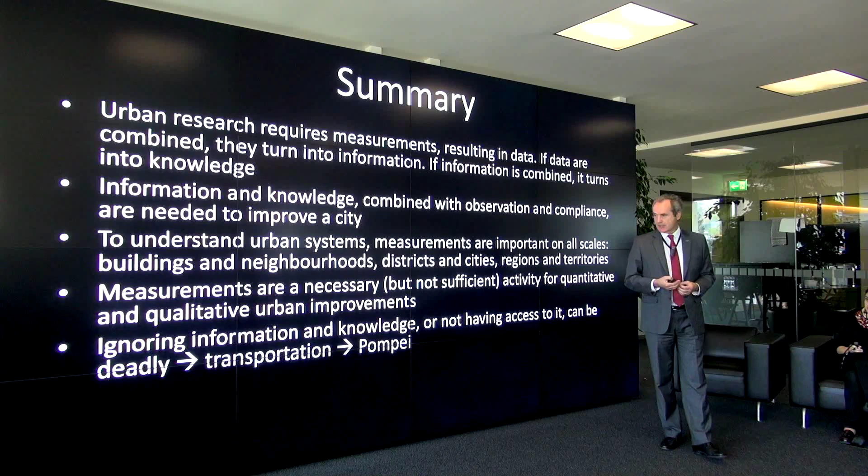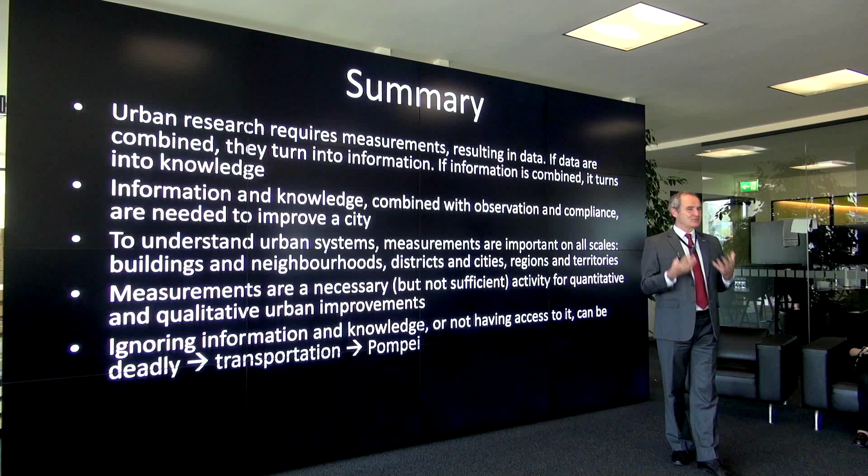Measurements are necessary, but not sufficient activity for quantitative and qualitative urban improvements. And the last point, as you saw from the examples at the beginning, is that ignoring information and knowledge, or not having access to it, can be really deadly in any normal activity like transportation or big-scale territorial activities like volcanoes or tsunamis. So with that, hopefully making the point for measurements and their meaning, I want to leave you and come back to your nodding head that measurements are not the only way to improve something. Something can be improved sometimes even without measurements, but that's something for you to think about more deeply.